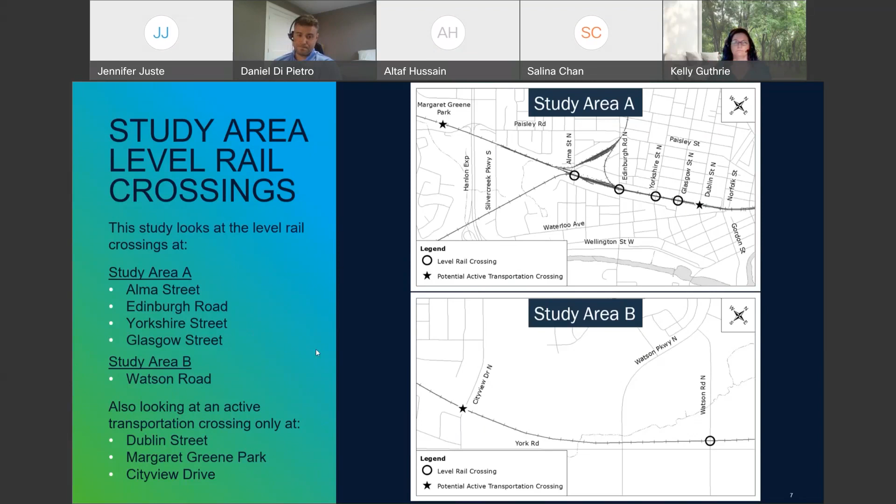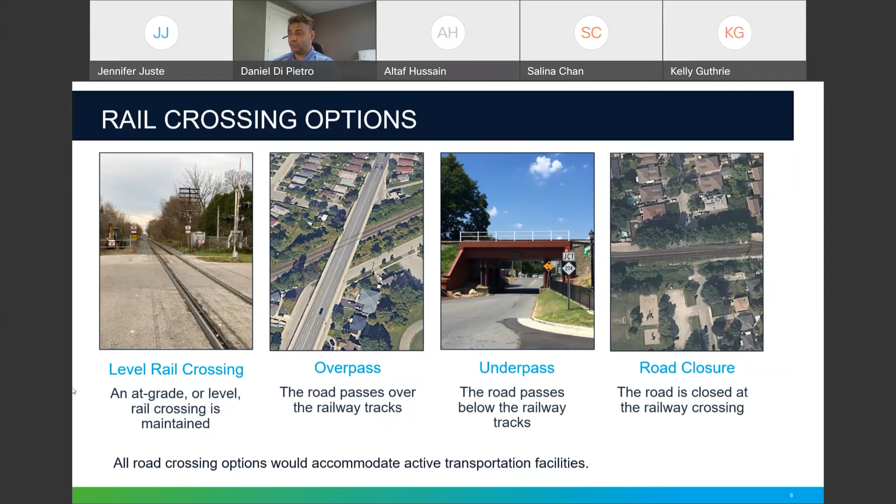So next, moving on to public and stakeholder consultation. This slide summarizes how we are engaging with you and stakeholders throughout the study. As a reminder, this is a proactive study to understand how rail crossing closures would impact our community before any changes are actually indicated.

We started in the fall of 2021 with an opportunity for the public to provide feedback on this study through an interactive survey on our Have Your Say website. We've also been consulting with specific stakeholders such as Metrolinx, Guelph Coalition for Active Transportation, and school boards. This current round of engagement will include this public open house and an opportunity to provide comments and feedback online until June 22nd.

So what did we hear from our initial survey? We received over 1,700 responses to the survey and appreciate your patience as we worked on getting answers to them. We heard that there's a strong desire to maintain vehicular and active transportation connectivity between neighborhoods on both sides of the Metrolinx rail corridor. We heard that traffic can be an existing problem around these rail crossings, and closing them would create increased congestion on adjacent roads.

Edinburgh Road, as we expected, should remain open to vehicular traffic. We heard that the Dublin Street closure has had a negative impact on the community. Requests were made to reopen the crossing either to all traffic or only active transportation. As a response to this, we have added consideration of an active transportation only crossing at Dublin Street as part of this study. Concerns were expressed about the noise, speed, and interruptions from Metrolinx and CN operations on the railroad tracks.

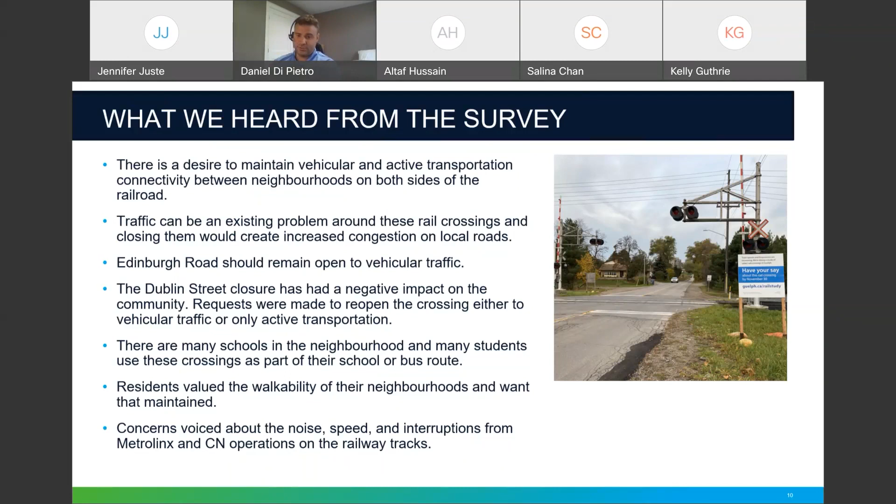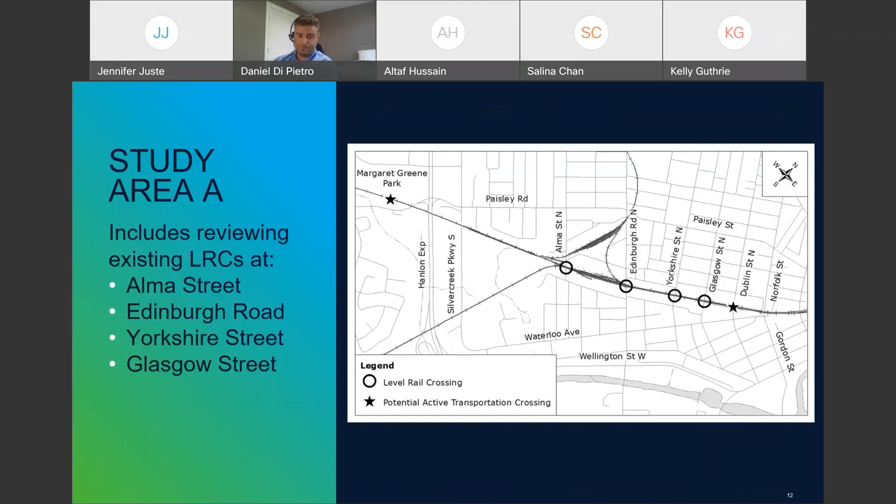So next, we're going to go to the existing level rail crossing analysis, which is part one of our study. The next few slides will review the results of the feasibility study. Study Area A includes 4 level rail crossings that were evaluated together due to their proximity and function in the local road network. The crossings include Alma Street, Edinburgh Road, Yorkshire Street, and Glasgow Street. So the existing conditions of Study Area A. Data was collected and traffic patterns were analyzed within the highlighted area you see on screen. It is bounded by Paisley Road to the north, Wellington Street to the south, Silvercreek Parkway to the west, and Gordon Street/Norfolk Street to the east.

When conducting a transportation study, the first thing you need to consider is how the network currently operates. This is what we call existing conditions. Under existing conditions, we found that Edinburgh Road serves significantly more peak hour traffic than the other 3 crossings. This is because Edinburgh Road is an arterial road and carries more traffic than the local roads that serve just the adjacent residences. We observed that the traffic from Dublin Street is being diverted to Glasgow and Yorkshire Streets. We also observed that the pedestrian and cyclist counts were typically highest during the weekends and in the PM peak period. Lastly, Silvercreek Parkway does not currently connect across the Metrolinx rail corridor.

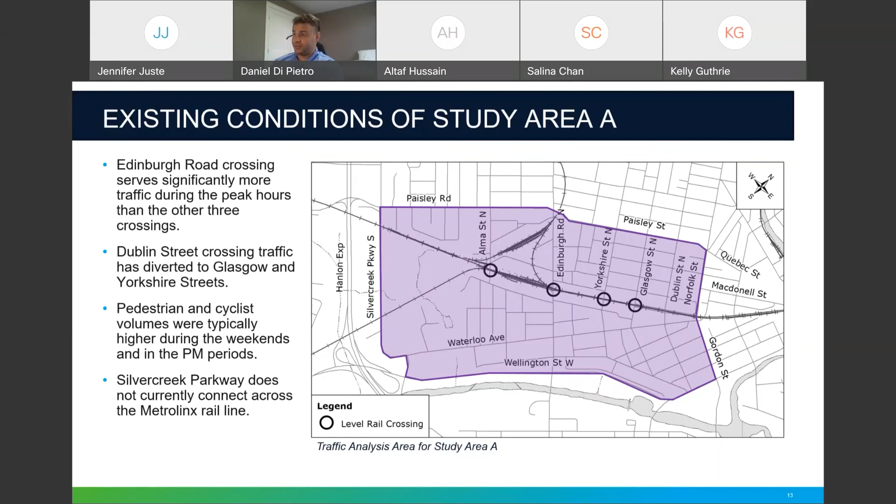So in order to do our future traffic study, we needed to come up with scenarios. And in order to do that, we needed to develop criteria to narrow them down. For Study Area A, there are many potential combinations of scenarios to consider. For example, each road had 4 potential options: to be closed, to have an overpass, an underpass, or remain at grade. In addition, there's a consideration of whether Silvercreek is connected in the future or remains closed at the Metrolinx rail corridor. This resulted in a large amount of potential scenarios.

So the consultants developed criteria to weed out the least feasible options and select the most feasible scenarios to explore in more detail. A fatal flaw analysis was conducted to rule out alternatives that didn't meet minimum requirements. For example, those that couldn't be constructed within the existing right-of-way, that didn't meet transportation needs, or that couldn't meet accessibility design standards. 7 of the best scenarios that minimize significant property, environmental, and/or construction cost impacts were selected for further analysis in the study.

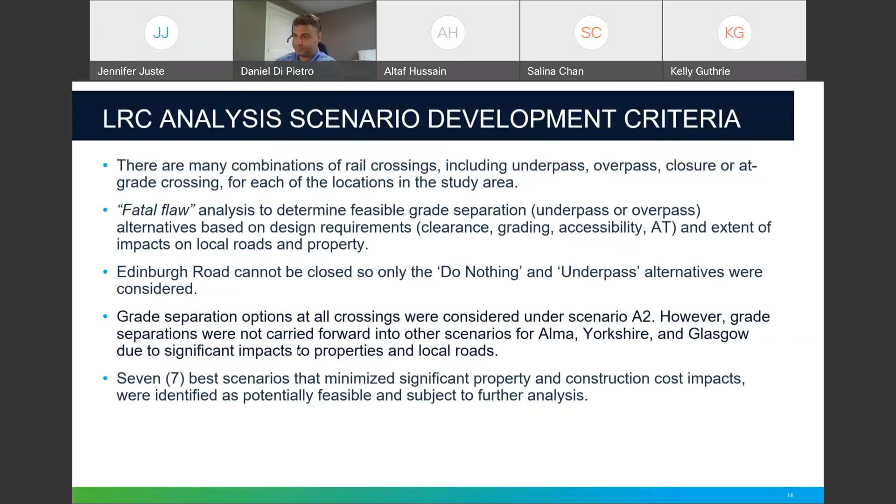So we're going to move on to the scenarios that were chosen. This table summarizes the 7 scenarios that were not eliminated through the fatal flaw screening. Each of these scenarios were further analyzed to determine future traffic impacts at 2041. The do nothing scenario means that the crossing would remain as a level rail crossing. Where crossings were considered to be closed, an active transportation only crossing would be considered in

that location. So going through the table, starting with the first scenario, scenario A1 is the do nothing scenario, which maintains a level rail crossing at all locations. Scenario A2 is considering a grade separation, either an overpass or underpass, at each location. Scenario A3 is considering the closing of all local streets and maintaining only Edinburgh Road open as a level rail crossing. Scenario A4 considers the closure of all local streets and a grade separation at Edinburgh Road.

Scenario A5 considers closing Alma and Glasgow while maintaining both Edinburgh and Yorkshire as level rail crossings. Scenario A6 considers closing Alma and Glasgow, maintains Yorkshire as a level rail crossing, and assumes Edinburgh Road is grade separated. And lastly, scenario A7 considers maintaining all local streets as level rail crossings and only Edinburgh Road for grade separation.

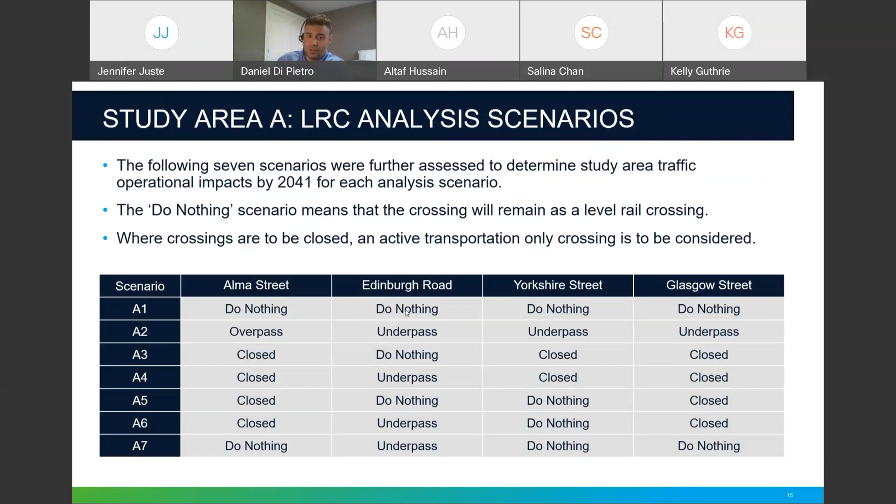So looking at our future 2041 traffic analysis, when assessing the future scenarios, we also consider the current and future plans for Silvercreek Parkway. Silvercreek does not currently connect across the Metrolinx rail corridor as mentioned earlier. However, there is an active development application that proposes connecting this road under the tracks. So scenarios A1 to A7 were analyzed under both assumptions: 1, that Silvercreek is connected, and 2, that Silvercreek remains closed.

A warrant analysis for grade separation at each crossing was completed according to the Transport Canada Grade Separation Assessment Guidelines using the forecasted future traffic conditions. At Alma, Yorkshire, and Glasgow, only the queue length criterion was met for grade separation. The criterion was met because projected queue lengths could be more than 30 meters and could block existing driveways. However, given the low density residential nature of this area, this isn't considered a major trigger for further consideration of grade separation.

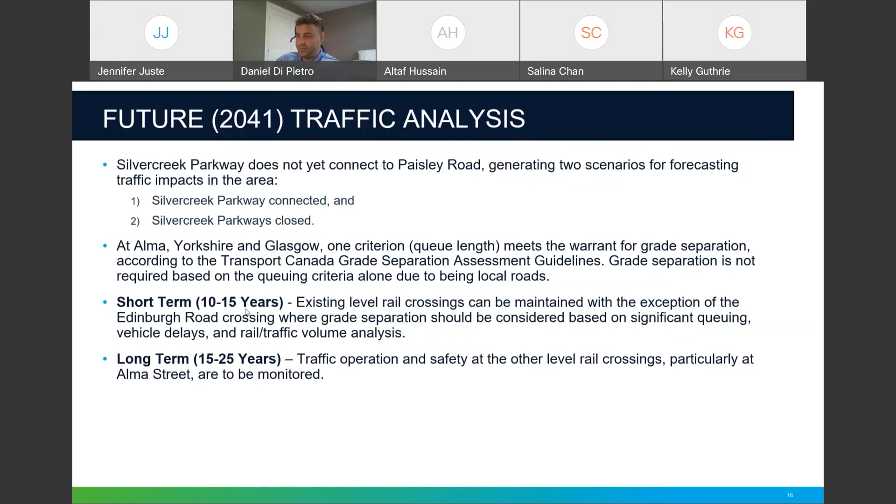In addition to the warrant analysis, the traffic study indicated that existing level rail crossings can be maintained for the short term, with the exception of Edinburgh Road crossing, where grade separation should be considered based on significant queuing, vehicle delays, and rail/traffic volume analysis. For the long term, the study indicates staff should continue to monitor traffic operations and safety at the other rail crossings, meaning Yorkshire, Alma, and Glasgow.

So moving on to evaluation criteria. The information on the previous slide was describing strictly traffic conditions. This is not the only criteria used to rank the 7 scenarios. Next, we will introduce the evaluation criteria we used to select a preferred scenario for study area A. The following criteria were used. Local traffic circulation considered how well the option minimized traffic impacts to the local neighborhoods. Connectivity considered how well the scenario reduced physical barriers to transportation across the rail corridor. Traffic operations preferred the scenarios that allowed for better traffic performance under future conditions.

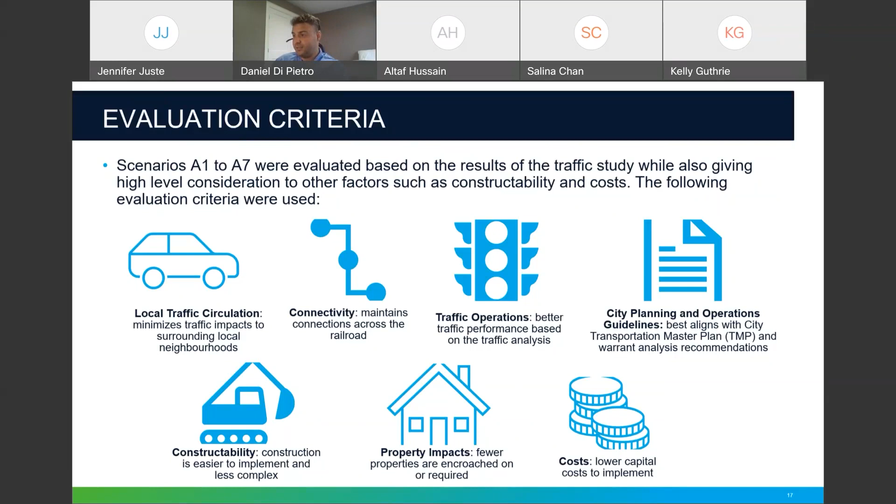City planning and operations guidelines evaluated how well the alternatives aligned with our current plans and policies, such as the Transportation Master Plan. Constructability evaluated how easy construction efforts would be. And property impacts considered the extent to which properties would be affected. Cost estimates were also considered. Higher cost options would score lower than affordable options.

So moving on to the evaluation of scenarios. Here's how the scenarios each scored in our evaluation analysis. The top row of this table indicates the scenario, and the side column lists each of the criteria I just described on the previous slide. The score follows the alphabet, where A is the best option and E is the least preferred. We used an X where an option didn't meet the minimum criteria.

Don't worry about reading all of this right now. We will share this presentation document online if you want to review it later in more detail. The table is continued on the next slide. So as seen on this table, we have our rankings at the bottom.

Scenario A7 is the preferred option. This scenario is where Alma, Yorkshire, and Glasgow remain as level rail crossings, and Edinburgh is converted to an underpass. Scenarios A5 and A6 were tied for second and third as they have better connectivity and traffic operations than the other scenarios due to the fact that Edinburgh and Yorkshire remain open either at grade or grade separated.

The least preferred option was scenario A2, which would be all grade separated. It was more of an extreme option. The costs as well as property impacts would be so large that it's not recommended. The scenario would also result in a large amount of local road closures, which the city is not in favor of, as it is not aligned with our goal of maintaining connectivity.

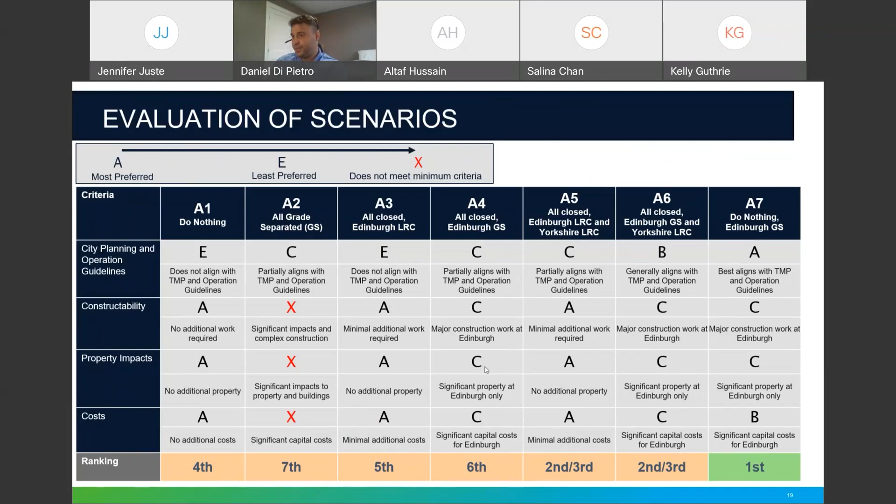So the preferred scenario, in summary, for study area A is scenario A7 with an underpass at Edinburgh Road. So for this underpass, an environmental assessment, Schedule C, would need to be initiated in the next 5 to 10 years to fully determine the preferred design option that least impacts residents and properties. Scenario A7 also means we maintain level rail crossings at Alma, Yorkshire, and Glasgow. Traffic operations and safety will continue to be monitored in the long term at these three locations.

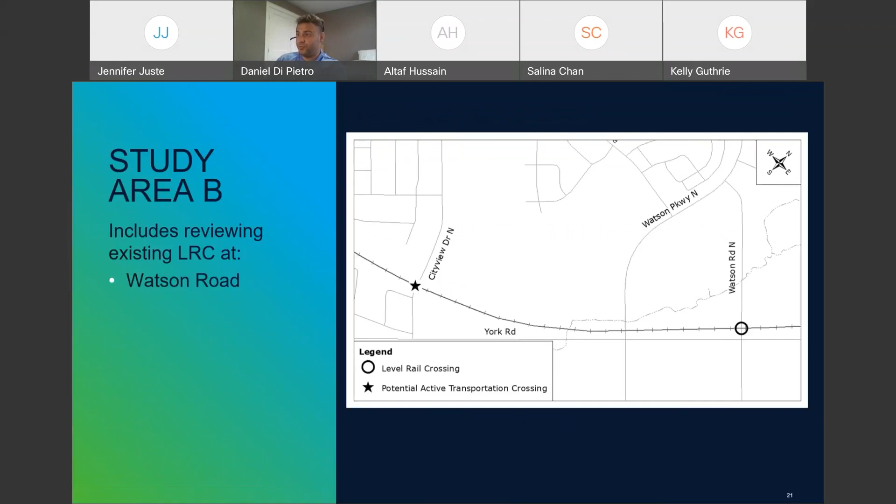So now moving on to study area B. It's much more straightforward. For study area B, one level rail crossing was evaluated at Watson Road North, just north of York Road. The existing conditions of study area B can be seen on the next slide. So study area B can be seen highlighted by the image on the screen. It is bounded by York Road to the south, Watson Parkway to the west, and Watson Road to the east.

When looking at the existing conditions, we found that the southbound queue at Watson Road and York Road exceeds the available 20 meters of space between the intersection and the rail crossing. Likewise, the forecasted northbound queue at the level rail crossing during afternoon peak hour is longer than the 20 meters of available space between the intersection and the rail crossings. However, the intersection and the rail crossing are equipped with a train preemption, which helps reduce queuing concerns in this area.

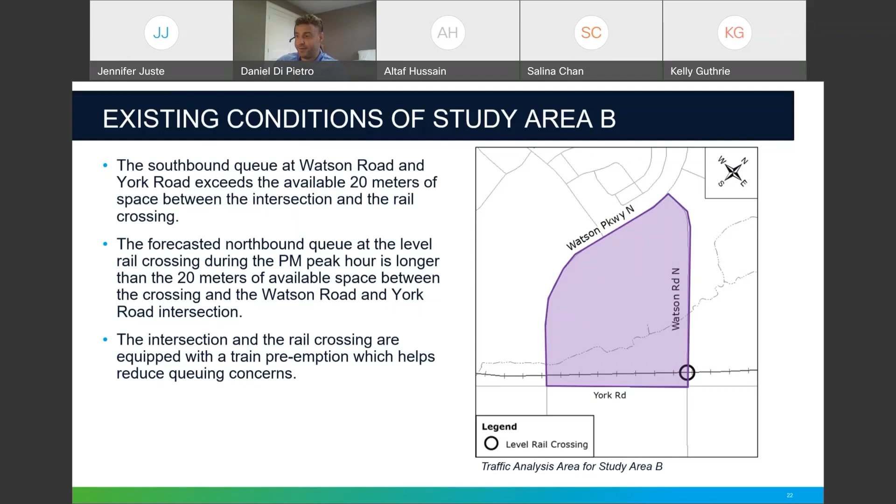So going to the future 2041 traffic analysis, since study area B is only one crossing, there are just three scenarios for consideration. B1, do nothing. B2, close the crossing. And B3, grade separation. So the do nothing scenario at Watson Road causes some traffic queuing in the future condition that may trigger a warrant for grade separation. Scenario B2, which includes closing the level rail crossing, ends up diverting all traffic going south on Watson Road North to Watson Parkway, which has a significant impact to the operations at the Starwood Drive and Watson Parkway intersection, as well as the Watson Parkway and York Road intersection.

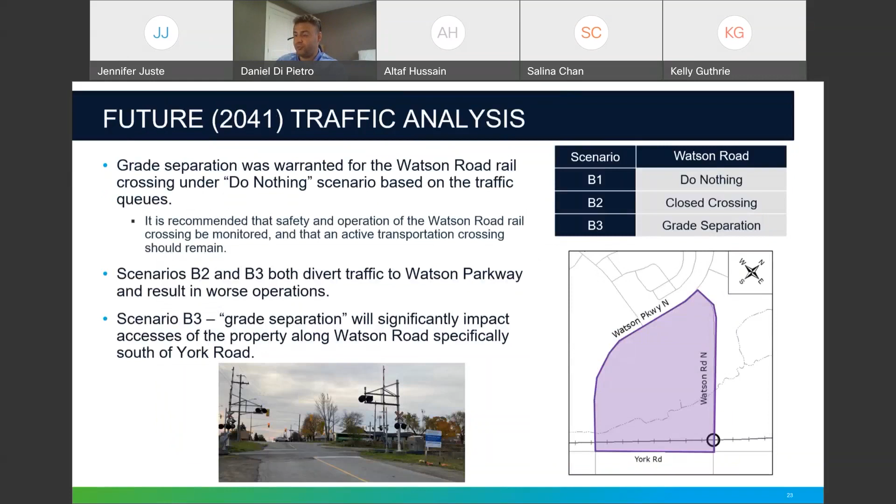Grade separation, scenario B3, is challenging at this location because it would significantly impact access to the property along Watson Road, especially south of York Road. It also prevents any vehicle access to Watson Road from York Road, adding traffic volumes to Watson Parkway. Scenario B3 impacts operations at the Starwood Drive and Watson Parkway intersection, as well as the Watson Parkway and York Road intersection. So moving on to the preferred scenario.

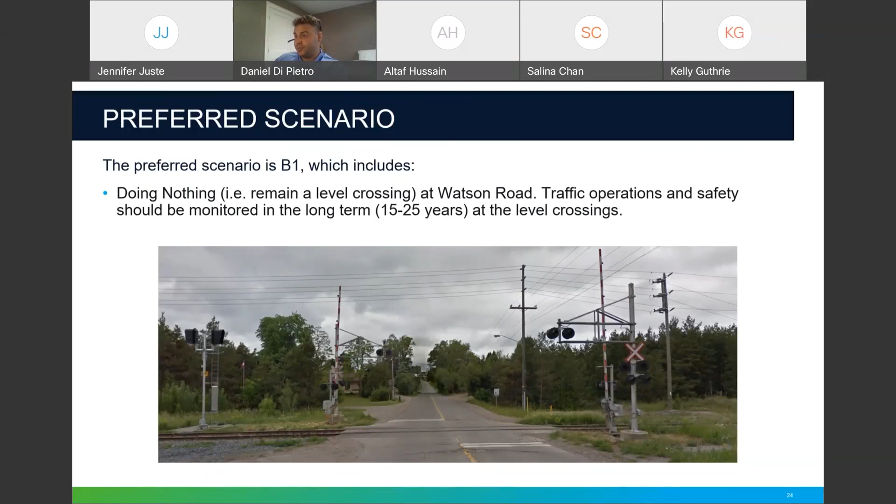Preferred scenario for study area B is scenario B1, which includes maintaining the level rail crossing at Watson Road. Traffic operations and safety will continue to be monitored in the long term at the level rail crossing. This option also helps manage operational impacts along Watson Parkway. Now I'll be handing the presentation back over to Jenny for part 2 of the feasibility study.

Thanks, Daniel. For the second part of the feasibility study, we analyzed potential active transportation only crossings to improve connectivity between neighborhoods. This part of the study was added to the project scope in response to the feedback we heard during last fall's public engagement.

Oh, sorry, I'm having a little bit of trouble with my glitchy mouse today.

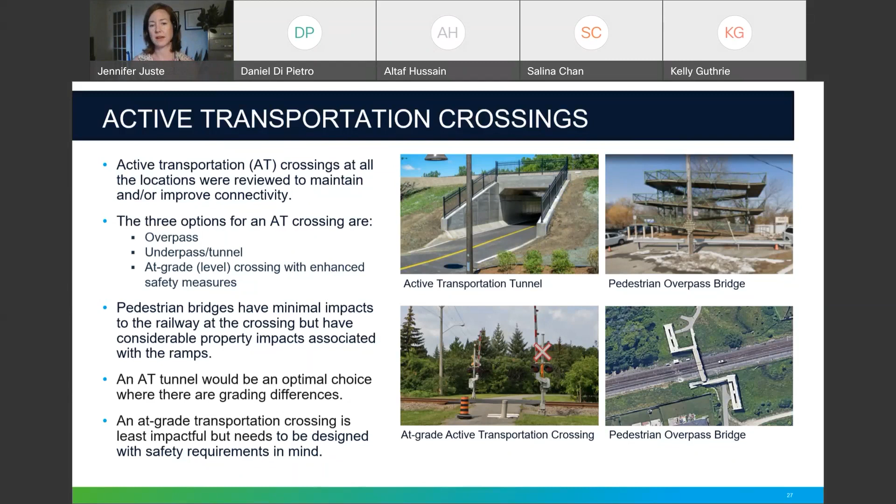An at-grade active transportation crossing would be the simplest option as it has the least impact on property, design complexity, and cost. Pedestrian bridges have the least impact at the railway, but for them to remain accessible to all abilities, they often require lengthy ramps that require substantial property. And lastly, the tunnels can be an optimal choice where the rail line is higher than the surrounding area, but in some cases, the tunnel can become so long that it doesn't feel safe to the users. So the photos on the right are some examples from other places in the world of these types of active transportation crossings that were being considered.

This table summarizes the recommended type of active transportation only crossing for the desired pedestrian crossing locations. For Cityview Drive, we need to do some further study to determine if a tunnel or bridge is best at that location. Right now, the approaches are quite steep on either side of the rail corridor, and we would need to do a bit more of a property analysis on where the property lines are in the right-of-way to determine what the impacts would be. But both of those options kind of tie for being the most ideal.

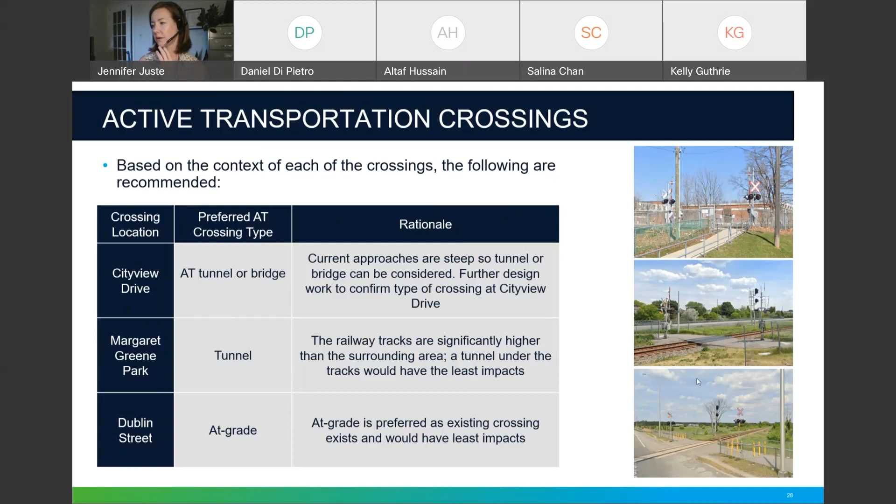For Margaret Greene Park, we're looking at considering a tunnel. The railway tracks there are quite a bit higher than the surrounding property, and so it would be fairly straightforward to provide a tunnel under the rail corridor at that location. And finally, an at-grade transportation-only crossing is the preferred option for Dublin Street. At-grade is preferred because it would have the least impact on property and is a more affordable option than doing a grade separation at this location. Some examples of these at-grade crossings for pedestrians and cyclists are shown on the right. So some of these are more local Ontario examples.

In terms of next steps, now that we've given you a fulsome overview of the findings of this study and feasibility analysis, we're going to continue to collect your feedback and comments on what you've heard and seen tonight up until June 22nd. So you can do that through Have Your Say on haveyoursay.guelph.ca for the level rail crossing study. You can also contact us directly. We'll provide contact information in a few slides. The final report, we're aiming to publish it before 2023. We'll post the final report to the project page.

And finally, the preferred scenarios for both study areas for the active transportation crossings all require additional studies through an environmental assessment before any further decision is made by the city on whether we proceed or not with grade separation. So these will be planned and budgeted through our capital budget process. And as part of any environmental assessment process, the public will have lots of other opportunities to provide input and engage on those projects.

Just a quick comment on some of the other work and projects that are happening related to the Metrolinx corridor at this time. We do continue to coordinate and consult with Metrolinx on this transportation feasibility study. They've been a key stakeholder and providing information on their plans and making sure that what we're proposing is compatible. They're also doing work currently on the Metrolinx line at Norfolk and Waterloo and at the Guelph Central Station. So you've probably seen a lot of their equipment out there if you live in Ward 5. And this is in preparation for a second continuous track and station platform expansion. This work doesn't have an impact on the study findings or the analysis that we conducted for this study. And if you want more updates on Metrolinx work or plans in Guelph, you can always visit guelph.ca/Metrolinx. We do keep this page as up to date as possible based on our frequent meetings with Metrolinx staff.